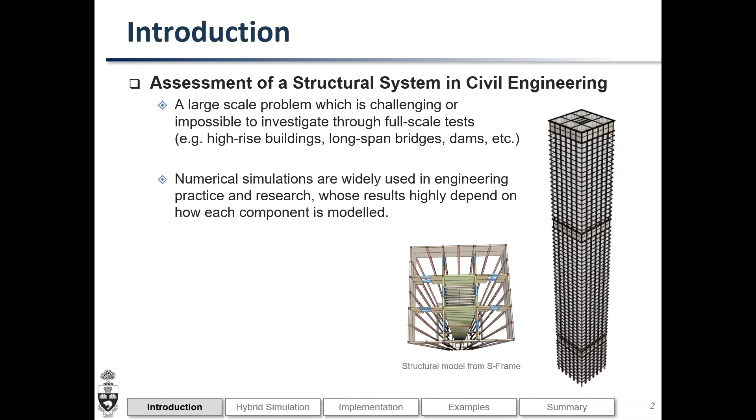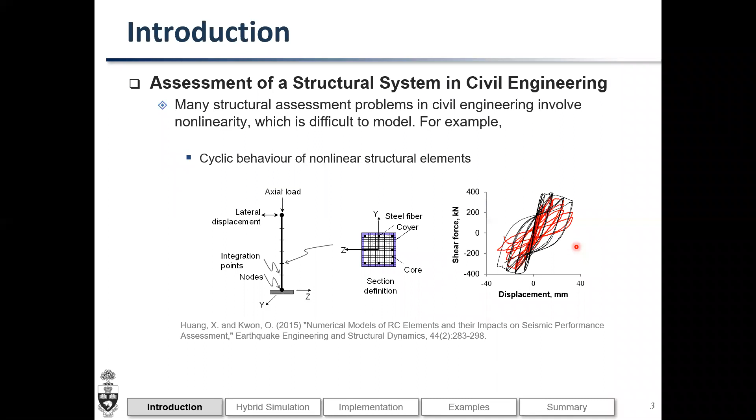There are many other nonlinearity problems in civil engineering. The problem of nonlinearity is important because if the system is linear, it is very straightforward to model. In the equation of motion, for example, you just need to define stiffness, damping, and mass. But if the system is nonlinear, you need to somehow define the hysteretic behavior.

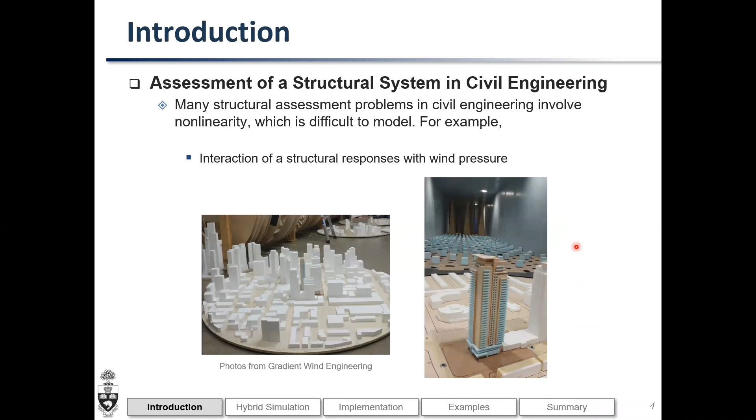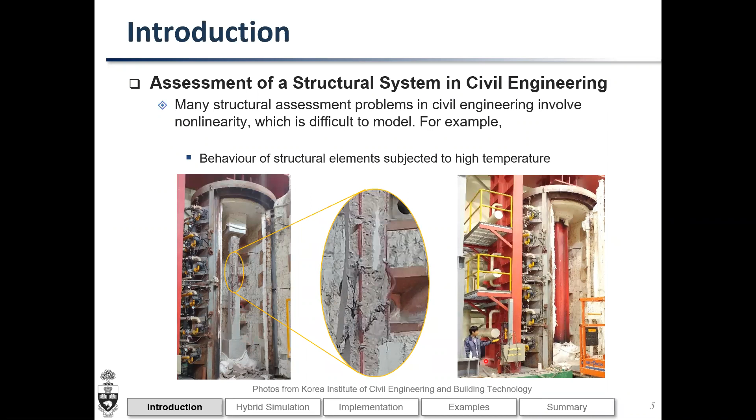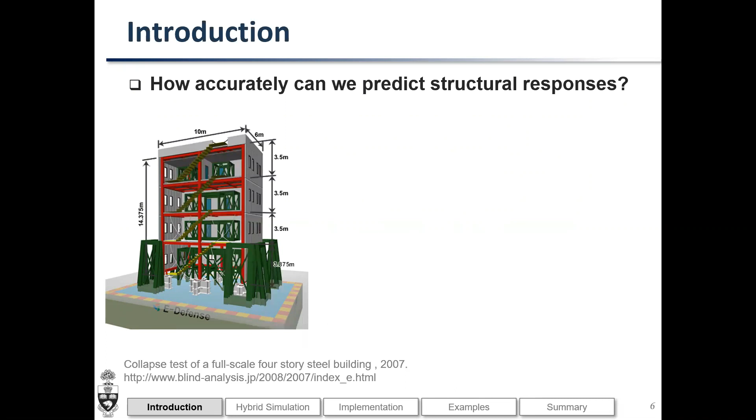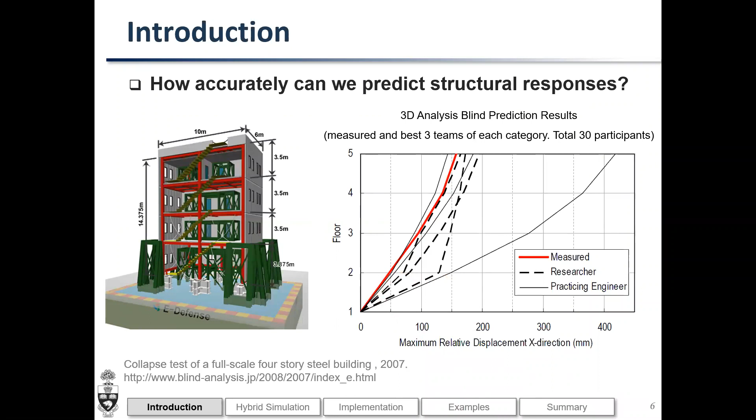So without having much uncertainty in the input to the numerical model, how well can you predict? This is the prediction result. There were 30 participants, and this plot compares measured response, the red line, with the top 3 predictions by researchers and practicing engineers, denoted with dashed and solid lines. As you can see, even though all the information is given as much as possible, the top 3 prediction results are sometimes pretty good, but sometimes quite bad. So depending on how we develop the numerical model based on the given information, our prediction can be very bad or close. There are quite large uncertainties.

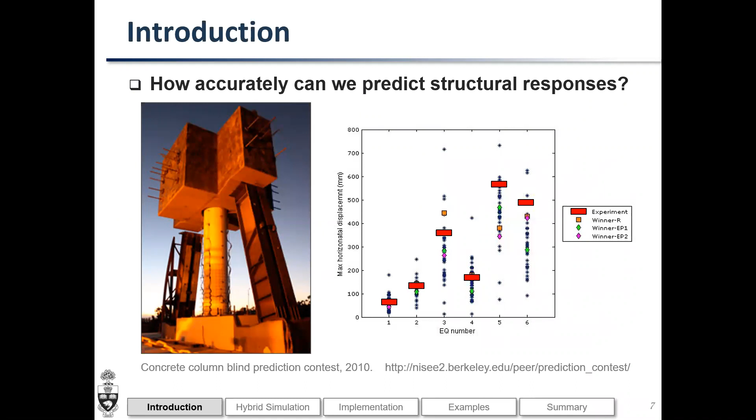That's why we tend to develop experimental specimens as shown here. If we can isolate an element from a system and put it in an experimental setting, like this column testing machine or shell element tester at the University of Toronto, then impose well-defined boundary conditions such as displacement cycles, we can get the result more precisely and understand the behavior better. You can do similar experiments with FE models. If we develop very detailed FE models of connections, our prediction on the connection behavior will be better than just a lumped spring approach. However, this type of modeling approach takes a lot of time and effort.

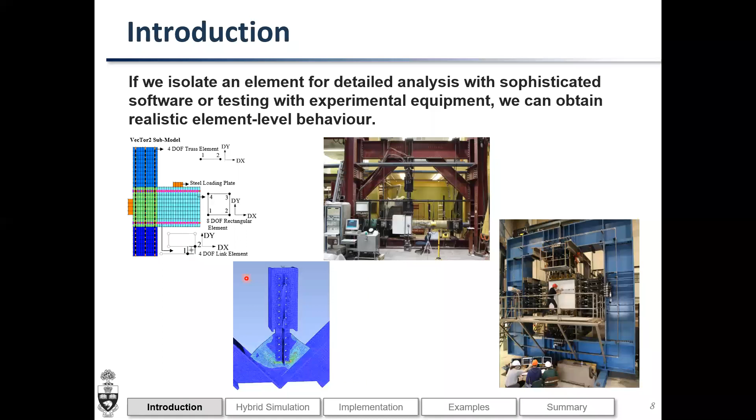The idea of hybrid simulation is to take advantage of these detailed models, either numerical or experimental. So if we can model inelastic cyclic behavior of components in the lab, using an earthquake scenario example, and use detailed models of other components in one FE software and the system model in another FE software, and integrate them all together, wouldn't it be possible to predict the response of a structure more accurately? That is the main idea.

Hybrid simulation is a useful method when there exists bidirectional interaction between a system and substructural elements. If the interaction is not significant, there is no point in running hybrid simulation. For example, if there is a building with thousands of structural elements, and you test only one of them in the lab and integrate it with the rest of the system, the response of that element may not influence the global response. So in my opinion, there is no point in running hybrid simulation. If that element significantly influences the response, then it is worthwhile.

For example, if there is a high-rise building supported on base isolation, and the high-rise building itself remains almost in the elastic range while the base isolation is represented in the lab, then I think this is quite a worthwhile experiment.

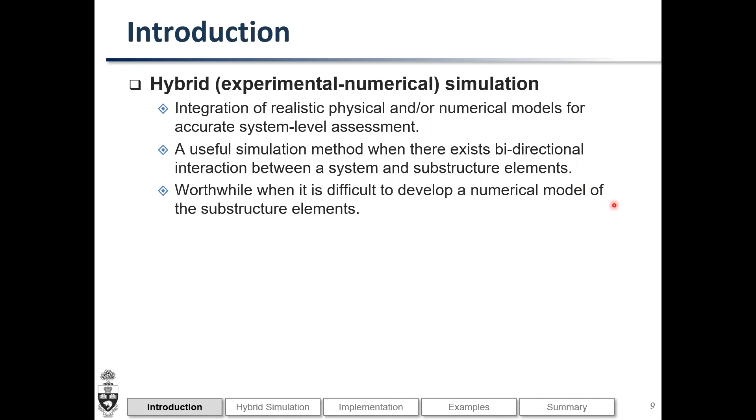Also, hybrid simulation is a very interesting tool, but it is worthwhile when it is difficult to develop a numerical model of these substructure elements. In other words, if you can precisely model the behavior of structural elements, there is no point in running an experiment. But if you have doubt about your numerical modeling strategy, and want to see the actual element behavior and its influence on system-level behavior, then it is worthwhile to run hybrid simulation.

As a last point about hybrid simulation, we need to focus on what we can learn by running it that we cannot learn through conventional component tests or purely numerical simulation. Just running hybrid simulation to integrate a numerical model and specimens in the lab is very interesting, but if you cannot learn anything new in terms of structural response or performance, then it stays just as interesting work without much to learn from the experiment.

So now, in today's presentation, I'm going to give an overview of hybrid simulation. You can see this progress bar. Then I'm going to show you how we implement it at the University of Toronto. The first section is a general overview, and the implementation is somewhat specific to how we run experiments and simulation at the University of Toronto. I'm going to give you several examples, either numerical hybrid simulation, which we call multi-platform simulation, and then repeat this slide summarizing what I've presented today.

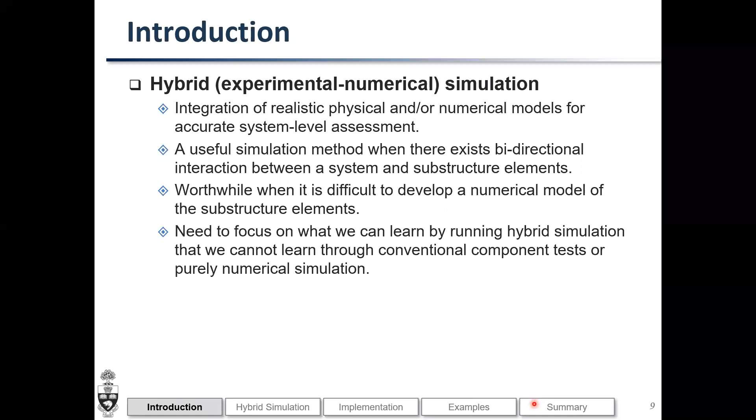In the problem of seismic or earthquake analysis, we are solving an equilibrium equation. At the end, in structural analysis problems, what we are doing is solving an equilibrium equation, either dynamic or static. In the dynamic equilibrium equation, including earthquake load, we have mass term, damping term, restoring force term, and applied force term. For the case of earthquake load, this will be minus m times influence factor times UG double dot.

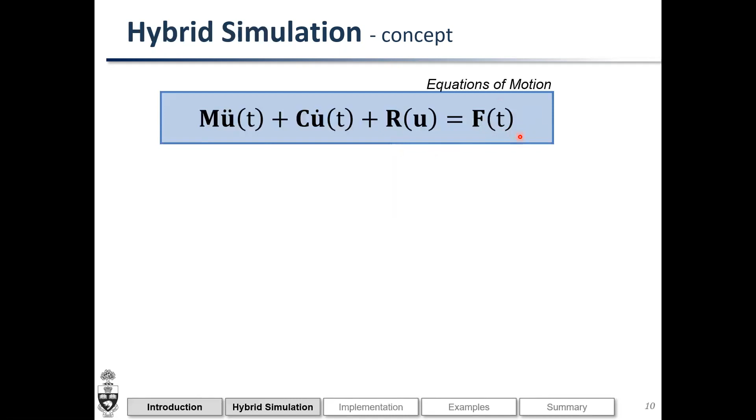In this equation of motion, we can solve this problem numerically using various time stepping methods, but this restoring force term is difficult to model or present using a numerical model, so if the system behaves in the inelastic range.

The idea of hybrid simulation is that we want to solve this equation of motion numerically using computer software, and then measure the restoring force from experiment and feed it back to the equation of motion, and we iterate this process. There are various numerical integration schemes regarding how to predict displacement and how to use the reaction force and how to repeat this process. But this is not the scope of presentation today.

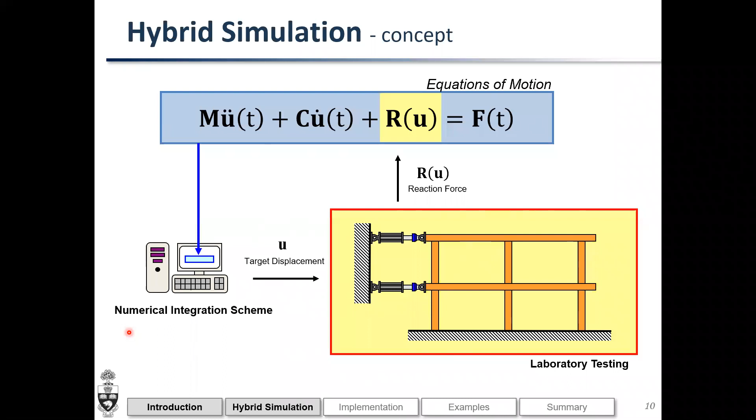Today I'm going to give a high-level overview. If we can model many parts of the structural system confidently using a numerical model, then what we can do is substructuring. So you can put most of the structural system in the analytical or numerical substructure, and then put the experimental specimen in the experimental substructure.

We ensure compatibility at the connection, at the interface, by imposing identical displacement vector that is predicted from the numerical integration scheme. Then restoring force vector is added from the numerical model and experimental specimen, and then we feed this restoring force vector back to the integration scheme. I'm showing this triangular shape to represent that part of this term, the restoring force term, is represented experimentally.

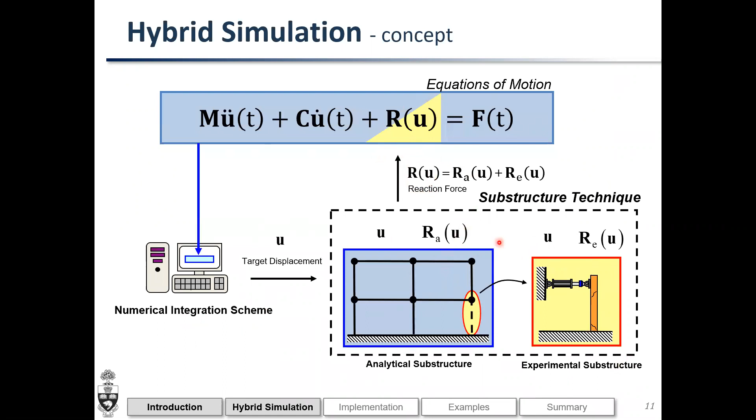This type of problem doesn't need to be only for the restoring force term. For the case of wind-bridge interaction, what they typically do is develop a section model of a bridge in a wind tunnel, and impose wind pressure, the flowing wind. Then there is interaction between the bridge deck's response with the wind. So the wind force, external force, is a function of displacement of the bridge deck and velocity of the bridge deck.

Because there is an interaction between the applied wind flow with the displacement and velocity of the system, we cannot predefine this right-hand side term. So this term can be represented experimentally in the lab because it's difficult to model numerically, and part of the system's mass is represented physically. So part of this force vector is represented physically, and we can run the hybrid simulation as well. This is one of the topics my students are working on nowadays.

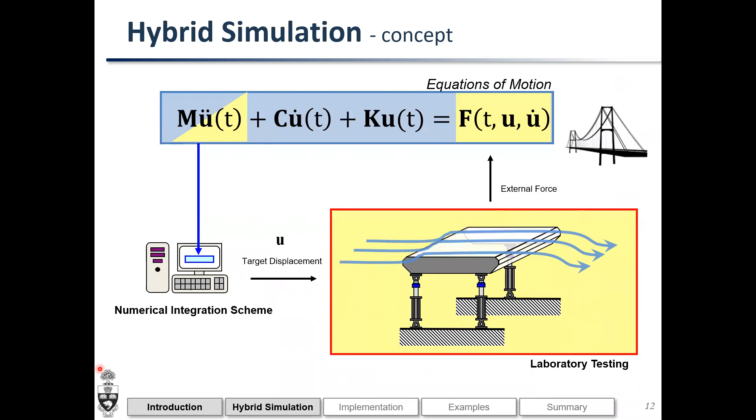Another application of hybrid simulation is structural interaction due to fire. Let us assume that this structural system is subjected to fire, then we are solving this problem. This is a static problem where the restoring force vector is a function of imposed displacement, temperature, and applied force. In this case, the applied force is the gravity load, and temperature changes over time.

Let us assume that we satisfy equilibrium and temperature changes gradually. Then what happens is that this equilibrium between restoring force and external force will not be satisfied. So we need to update displacement such that equilibrium can be ensured. We are solving a nonlinear solution scheme to ensure equilibrium between restoring force and applied force, and in that solution scheme we predict target displacement and run the experiment.

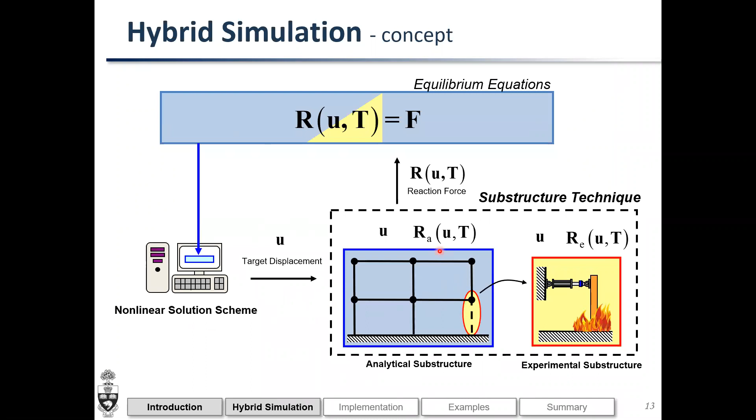As I explained briefly a few slides earlier, in hybrid simulation we essentially solve equilibrium equations, either static or dynamic. Hybrid simulation doesn't need to be only an earthquake engineering problem or dynamic problem, it can be a static problem as well. As long as there are parts of the equilibrium equation that are difficult to model numerically, we can model them experimentally. In the seismic application, for example, this restoring force vector is difficult to model fully numerically.

So part of the structure can be modeled experimentally. In the temperature load case, similarly in the wind load case, we are in fact defining external force experimentally rather than the restoring force. So terms that we understand well are represented numerically, and the rest can be modeled experimentally. It doesn't need to be restoring force only; it can be either restoring force or external force as well.

Hybrid simulation mainly has two types, as you may have heard from Professor Oh's presentation earlier. One of them is real-time hybrid simulation.

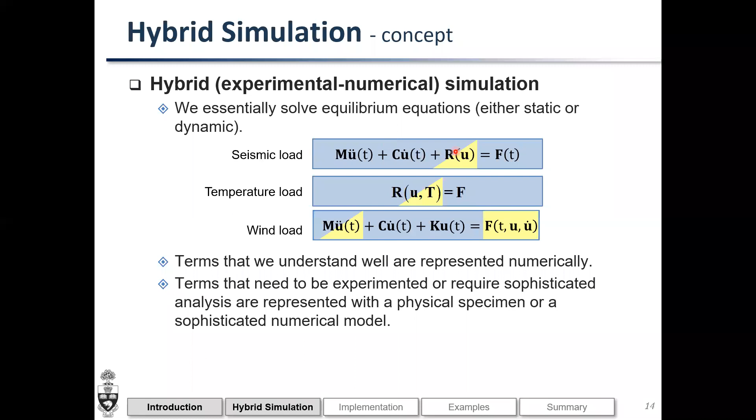Some physically represented terms in the equilibrium equations require realistic rate of loading, because viscoelastic dampers or viscous dampers, as shown here, depend on the velocity or acceleration, not just restoring force but also applied force. Some elements, such as tuned liquid dampers, tuned mass dampers, or inertial mass dampers, require accurate velocity or acceleration.

Wind flow interacting with the deformed geometry of a structure is a function of vibration frequency, meaning how fast the structure moves with respect to the wind, so it also requires real-time simulation. Heat conduction, even though it's a slow process, cannot be controlled in a stepwise manner, so it also needs to be done in real time.

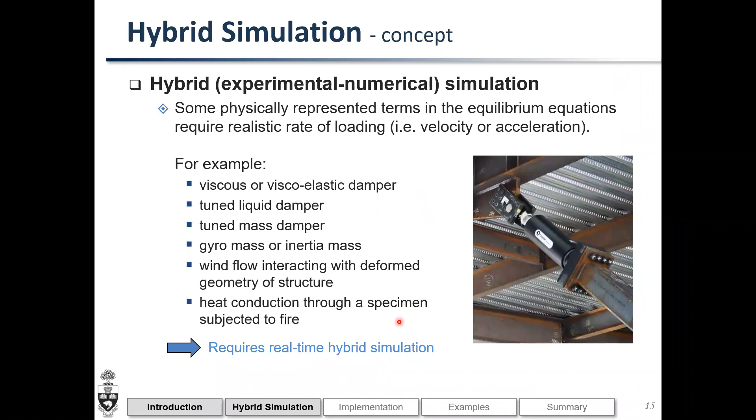These types of problems require real-time hybrid simulation. Some of them are dynamic, like all the cases except heat flow, while others are static or pseudo-dynamic problems—a slow process. But in all of these tests, the experiment should be done at the real rate of loading, or the real rate of temperature increase in the case of fire problems.

There are advantages of real-time simulation. One advantage is the realistic loading rate—if the elements depend on rate of loading, it is applicable. In fact, it applies to all structural elements, regardless of whether they are rate dependent or rate independent. Even rate-independent elements, such as steel beam-column connections, can still be tested using real-time hybrid simulation.

There are also many challenges in real-time hybrid simulation. One major challenge, a long-standing research topic, is actuator delay compensation—the negative effect caused by actuator delay. Researchers developed actuator controllers to compensate for this delay. Also, for dynamic problems, dynamic actuators are required, which differ somewhat from actuators mainly used for static tests.

Numerical models need to be simplified for real-time simulation. Not only the experiment but also the analysis must be completed within a given time step. For example, if we run a time integration scheme with a 0.01 second numerical integration time step, then all analysis and experiment must be completed within that 0.01 second, and the responses of both need to be integrated together.

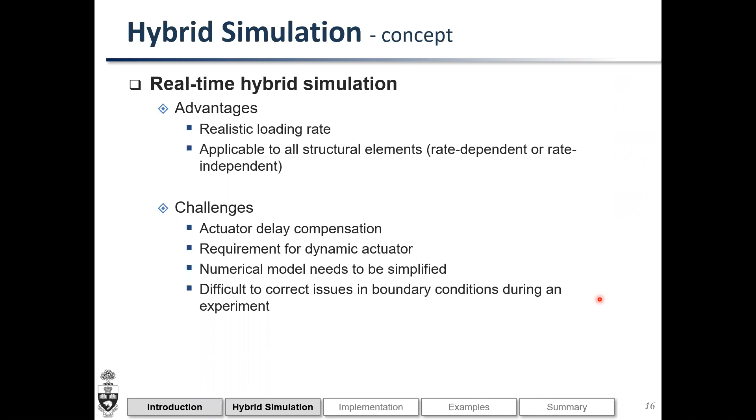Many other physically represented terms in the equilibrium equation I explained earlier are rate independent. In fact, most civil engineering structural elements made of reinforced concrete, steel, wood, or masonry are rate independent, meaning their behavior is mainly a function of displacement history rather than velocity or acceleration. Some studies show rate dependency in these elements, but for earthquake engineering problems, I feel this rate-dependent behavior is not very significant.

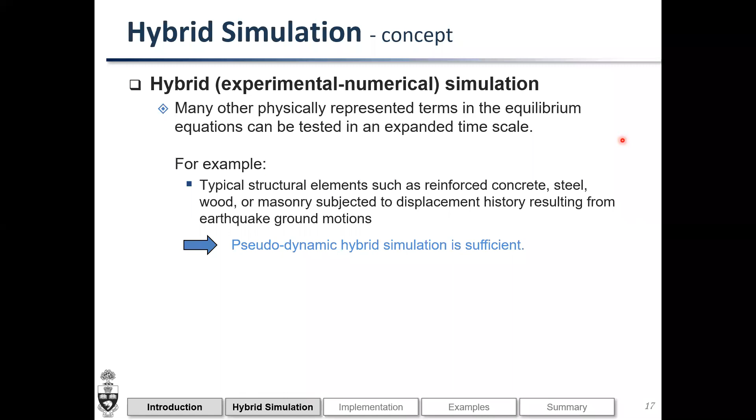For this kind of problem, we can use pseudo-dynamic hybrid simulation. Its advantage is that we can use a sophisticated and highly nonlinear numerical model for the rest of the system, because the time scale is expanded—we don't need to finish the numerical integration within a given time step like 0.01 second. We can run many iterations in the numerical model before moving on to the next step.

Because this is not a dynamic problem, but a static problem, we do not need the dynamic actuator. Most conventional hydraulic actuator controllers can be used.

I'm going to explain this further later on when I explain the communication. Delay compensation is not required because delay is not an issue.

There is time to correct any boundary condition issues during the test, such as elastic deformation, slip, and gap in the experimental setup. We try to avoid these when we build the experimental setup, but we cannot perfectly eliminate all of this, so we need to somehow correct this during the experiment.

The challenge of this method is that we cannot run the test with a damper, such as a viscoelastic damper, which is rate dependent. So this pseudo-dynamic hybrid simulation method is applicable only to rate-independent elements.

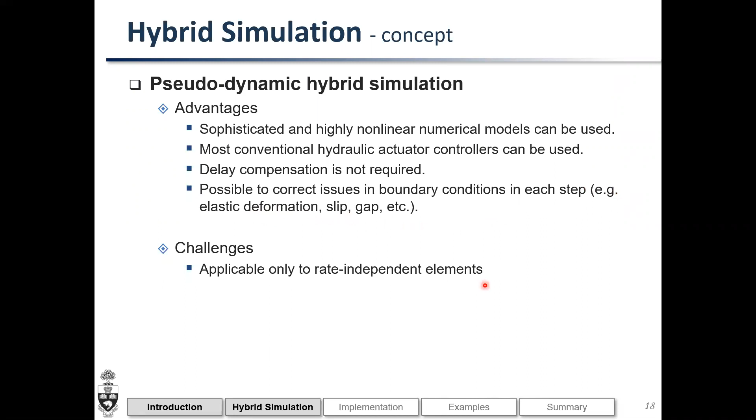Basically, hybrid simulation is a substructuring technique. The restoring force vector is sometimes displacement, velocity, or acceleration dependent, depending on the type of problem. But as long as you can substructure it and solve this equation of motion or equilibrium equation, then you can run hybrid simulation.

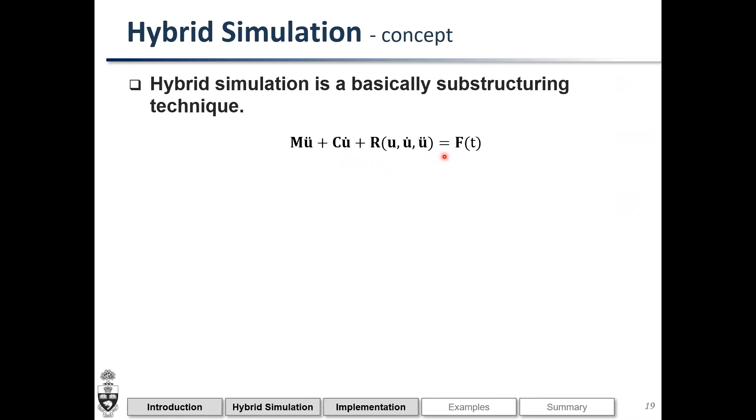Dynamic problems can be nonlinear as well. We typically use an explicit scheme, however, to avoid iteration that we normally do in the implicit scheme.

We typically use a non-iterative solution method even for the nonlinear solution scheme, especially for real-time simulation, because if we need to do a certain number of iterations and that number differs at every time step, it becomes difficult to maintain the timing.

Another essential component to run hybrid simulation is communication. At the end, hybrid simulation is in a sense very similar to typical finite element analysis, in that some of the restoring force vector comes from one element, another comes from another element which is now physical, and we are just assembling them to form the large restoring force vector.

So the problem is how to send predicted displacement to the actuator controller, how to read the force, and how to feed it back to the FE analysis software or numerical integration module. Communication becomes one of the major components in implementing hybrid simulation.

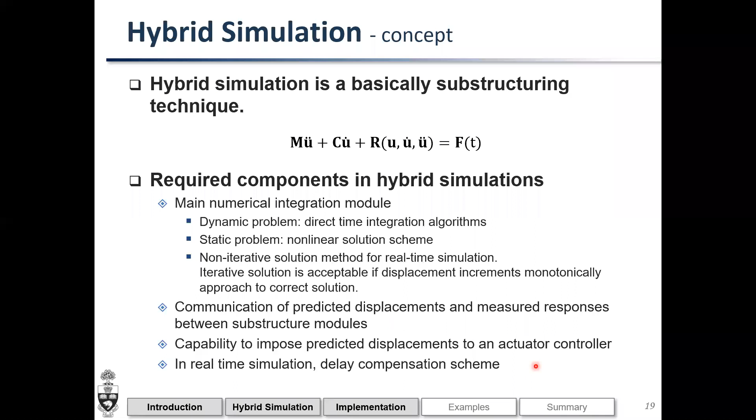Now I'm going to show you how we implement and run experiments at the University of Toronto.

UI-SimCor is the program that I wrote when I was a student, which runs only the time integration scheme. It doesn't have any numerical model or numerical elements - it just runs the alpha-OS scheme or any other time integration scheme. The restoring forces are all taken from either experimental substructure modules or numerical substructure modules.

We have developed a program called Cyrus, mainly to integrate various VecTor programs specialized for reinforced concrete structures. Sometimes we use OpenSees SP or MP, Abaqus, and S-Frame, etc. So the integration module can be anything.

If you have your own program, you can use it as the main program for hybrid simulation. As long as you can send data to the substructure element, either numerical or physical, and get the data back to your software, then you can run hybrid simulation.

So the main component of hybrid simulation in that sense is communication. As long as we can send and receive data between various software, then we can mix and match various numerical or physical elements and develop a system-level model.

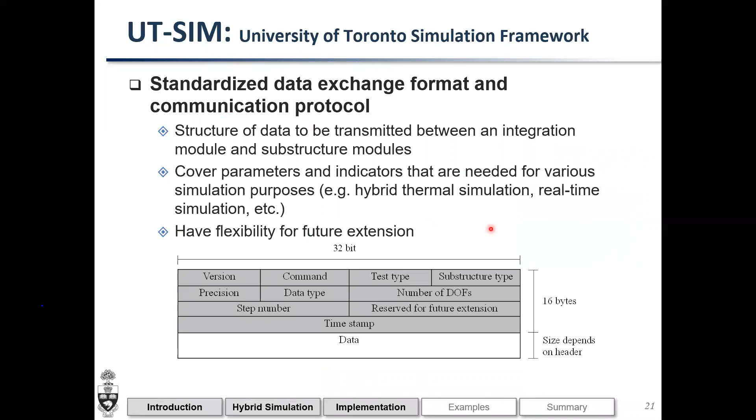We can use a library and connect to any one of these to send and receive data. This is a very flexible structure. We built a library file which you can call to connect and send and receive data.

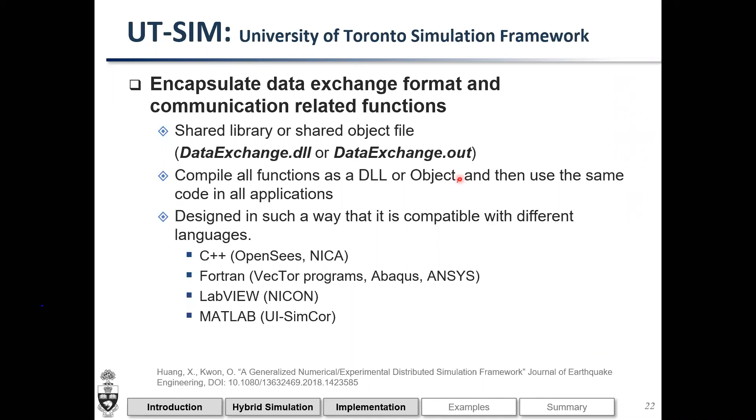This library file has been compiled as a dynamic link library (DLL) file, or the out file for Unix systems, so it can be called from C++, Fortran, LabVIEW, and MATLAB. You can build your own substructure model in MATLAB or OpenSees and connect it to other programs. Another main component in running hybrid simulation with a physical specimen is communication between the actuator controller and one of these main integration modules. Typical actuator controllers do not have functionality to receive and send data through a network, so digital communication is needed.

So what we have done is this: we developed a program called NICON, which we call the Network Interface for Controllers.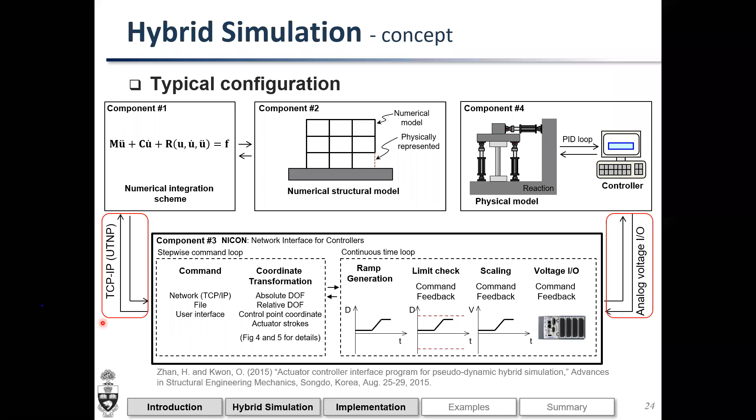In pseudo-dynamic hybrid simulation, component number 3 is not running at full speed in real time, but it performs many checks and corrections for the boundary conditions. So in terms of communication, as I explained, we use TCP/IP network and analog voltage I/O.

Why are we using analog voltage I/O? There are some reasons. Between hardware controllers—in this case hydraulic actuator controls—and the software, there are various ways of running communication. One is SCRAMNet, which is quite common with MTS actuators. In other fields like robotics and factory automation, they communicate with the controller through Modbus TCP or EtherCAT—digital ways of exchanging data.

As far as I know, most hydraulic actuators, if you have an actuator and controller in your lab, communicate via analog means—imposing displacement commands through voltage signals and outputting results the same way. Analog communication is the very traditional way of imposing displacement and receiving measured responses in most hydraulic actuators.

In the past, I've used MTS controllers, and other controllers from Instron and Samyeon, etc., to run pseudo-dynamic hybrid simulation using analog voltage I/O signals. That's the reason why we use analog I/O to run communication between the numerical model and the actuator controller.

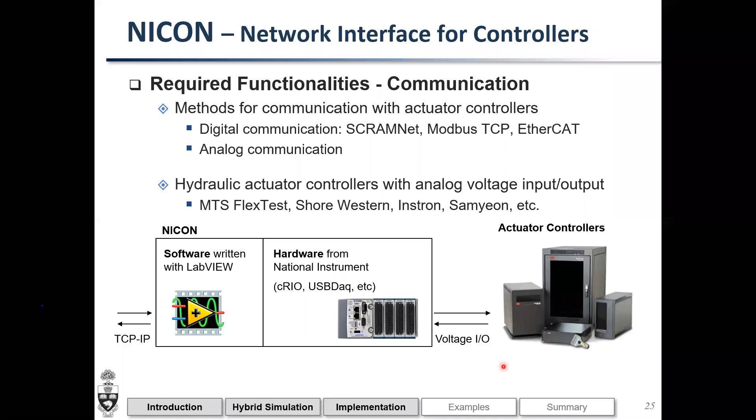There is certainly a disadvantage of voltage I/O because of inherent noise from analog signals, but as long as you insulate and ground them properly, it's fine. I've seen many other research groups using analog voltage I/O to run real-time hybrid simulations as well.

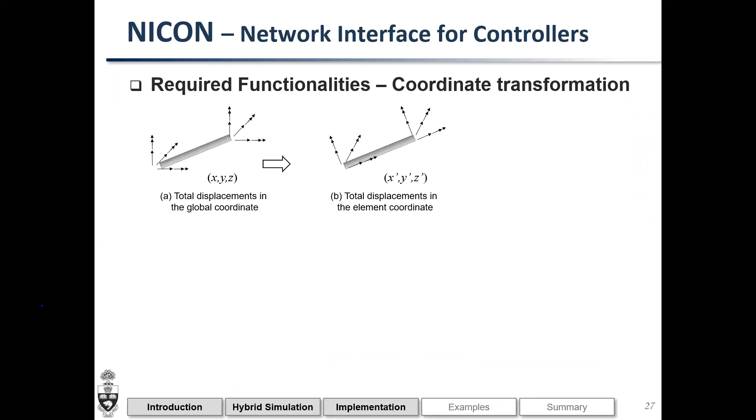There are several other functionalities that the interface program takes care of, such as coordinate transformation. For example, in FE software, if you analyze a frame element with 12 DOFs per element—6 DOF per node—we need to align them to a local coordinate system, because the rigid body mode does not influence the restoring force of the element. So we take out all the rigid body modes and just use the deformation modes.

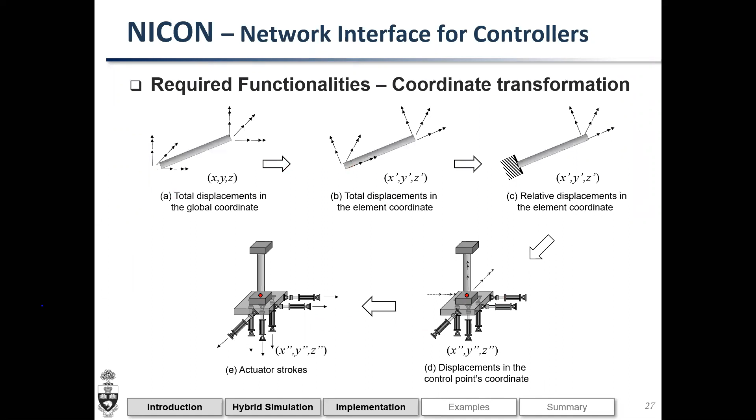Because this local coordinate system may not be aligned with the experimental setup's coordinate system, we need to align it. Then the experimental setup's displacement vectors will be different from the individual actuator's stroke, so we need to convert the displacement in the experimental setup's coordinate system back to the actuator's strokes. Once we impose deformation, we read forces from the load cells and convert these readings all the way back. This is the one process that we need to have in the interface program.

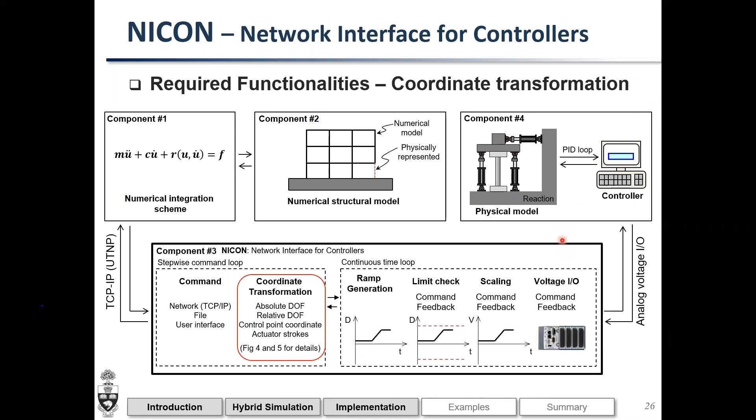There are several other features, such as ramp generation. It can be ramp and hold, or continuous, or safety checks, etc. In case the command is too large and may damage the specimen or equipment, we need to control that.

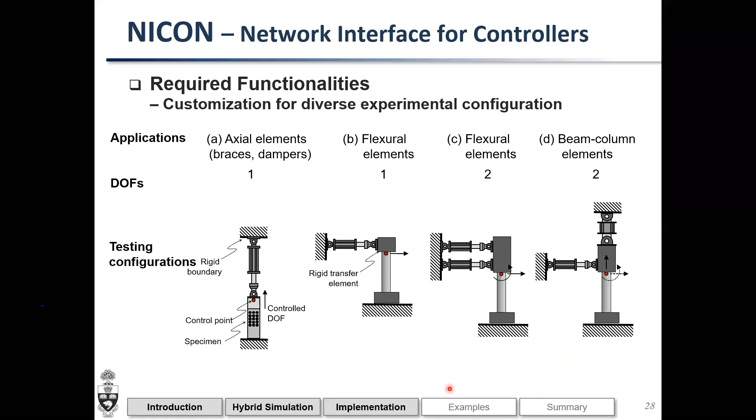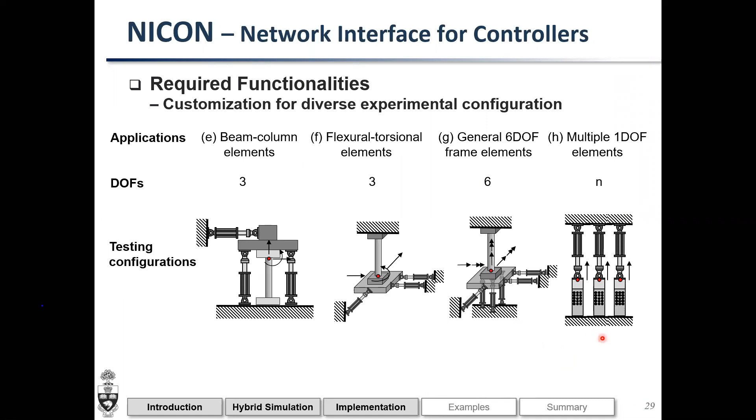So these are the main features of the interface program, which has been generalized for various test configurations in civil engineering problems, such as shown here or in the next slide. You can do multi-DOF control or many single-DOF control. Essentially, if you want to run hybrid simulation or pseudo-dynamic hybrid simulation in your lab, what you need is one of these software, or it can be your own program, like MATLAB.

And then what you need is a way to send and receive data to the actuator controller. To receive and send data, we can use network communication using the UTNP framework. And then to impose received displacement to the actuator controller, we use NICON, which is written in LabVIEW, and it interfaces with various hardware, data acquisition hardware from National Instrument.

For the purpose of training, because in the very beginning it's hard to start, and also it's a little bit dangerous because you don't want to damage the specimen or equipment, what we have done in our group is build a controller, actuator, and specimen which mimic the behavior of a hydraulic system. It's not high power, it doesn't have high force capacity, and it's not real time.

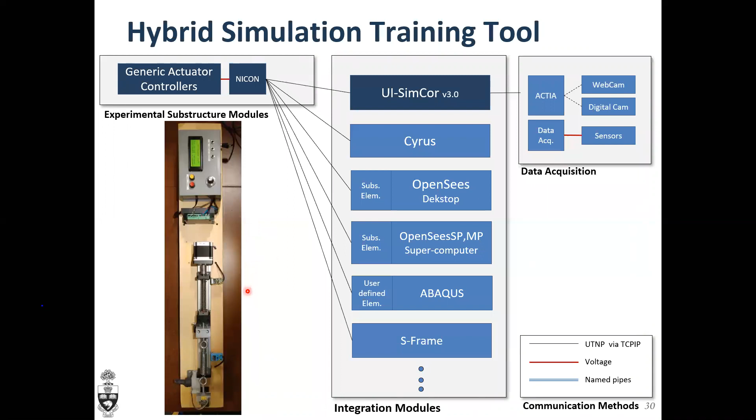So I'll show you several application examples. For the sake of time, I'm going to go through somewhat quickly. One application example is using UI-SimCor, OpenSees, and a generic actuator controller, where we tested a self-centering energy dissipating brace, which was invented by my colleague, Professor Constantin Christopoulos.

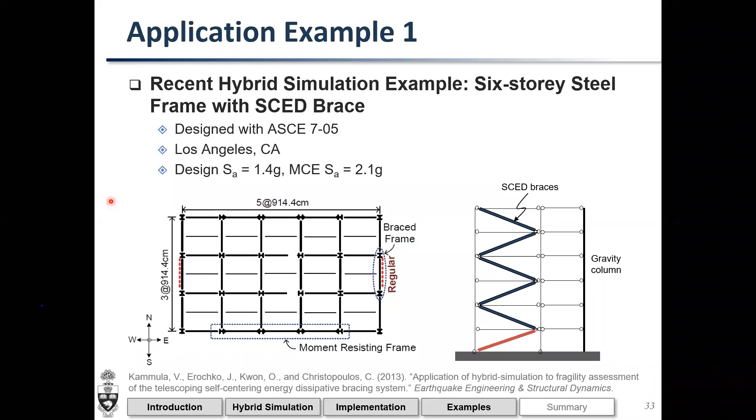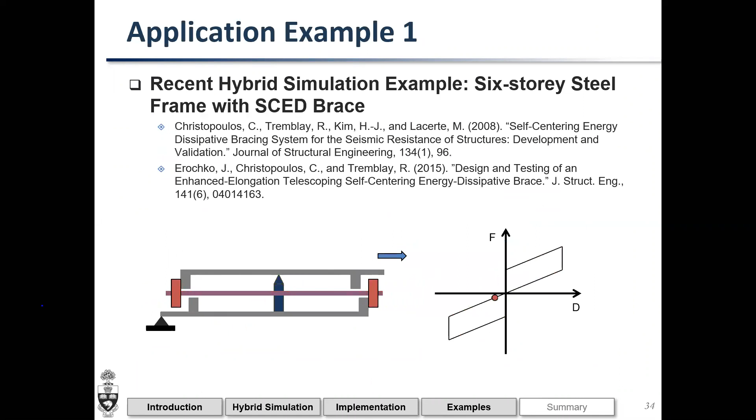So the building is a 6-story building, and the brace is an energy dissipating brace. It mainly consists of two steel tubes confined with a tendon. Both in compression and tension, it behaves linear elastically. The tendon behaves in the linear elastic range, and it comes back to the original configuration after imposing large inelastic cycles of loading. So we ran pseudo-dynamic simulation.

The specimen is in the lab, and data exchange between the specimen and the OpenSees model was carried out through internet network and analog voltage I/O. You can see the lower connection, upper connection, and hysteretic behaviors, etc. I'm not going to go through details about the test results for the sake of time, but this is the way we ran hybrid simulation. You can see the overall configuration of the experiment.

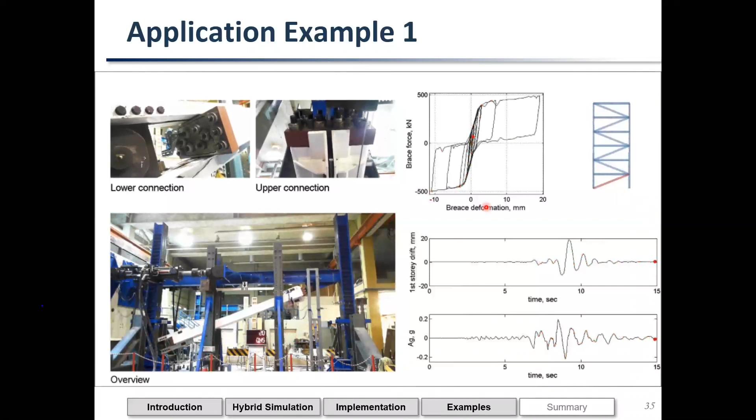Another example is the integration of OpenSees with a generic actuator controller. This is not using, as I told you before, UI-SimCor—you just impose voltage signals from NICON to the actuator controller. In this test, we use the hardware called UT10 simulator, with which we can test up to 10 actuator-loaded elements simultaneously.

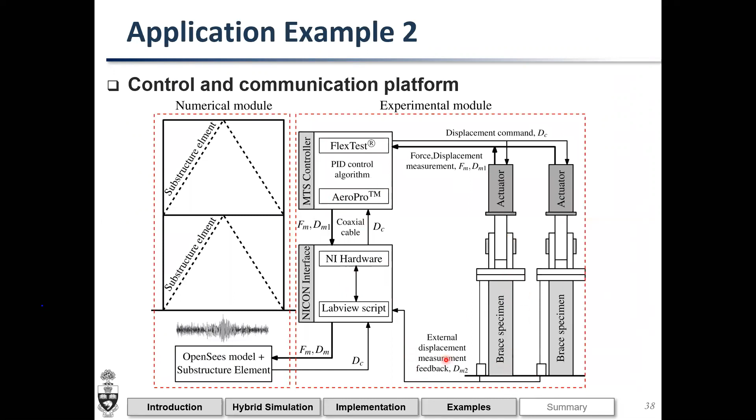Because the actuator-loaded elements are typically very stiff and there are problems with elastic deformation, what we do is measure the deformation of the specimen directly from the specimen and feed this data back to NICON to correct commands. There is some error correction loop between NICON, the MTS controller, and the specimen. We use OpenSees to run the main integration module, the numerical integration module.

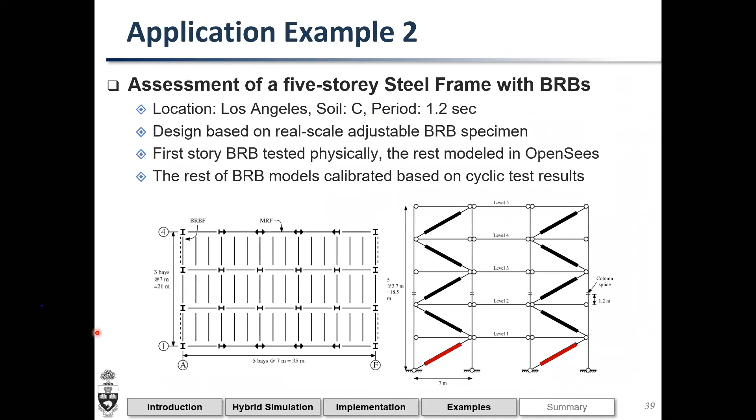So we ran an experiment for a 5-story building designed for Los Angeles. This is showing the experimental specimen, which represents the core of the building, and this is the experimental result.

You can see there is a slight difference between the experimental result, which is hybrid simulation shown as the black line, and the numerical result, shown as the red line. This slight difference resulted from unloading during the loading phase. When there's a transition between elastic and inelastic behavior, the numerical model shows a sharper transition than the experimental result, causing this difference. This shows that by running hybrid simulation, we can identify potential issues with the numerical model as well.

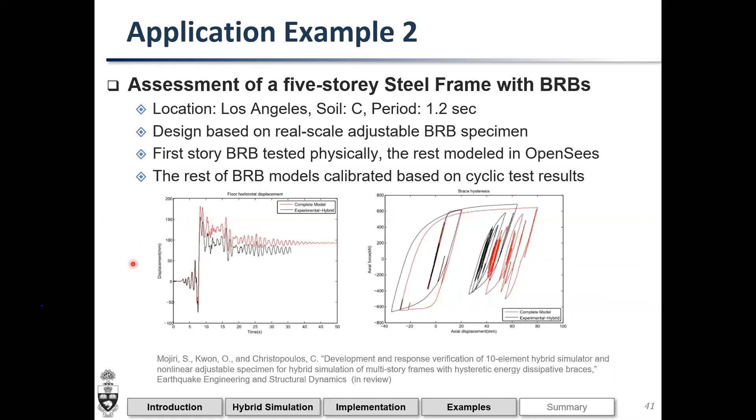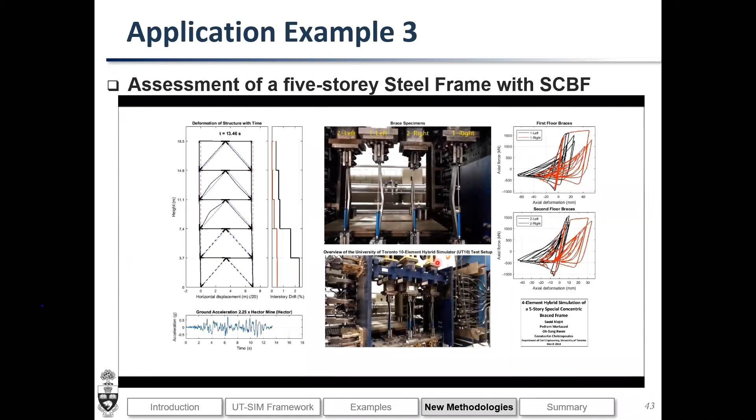We have done 3 element tests, with 3 BRB elements tested simultaneously. Recently, using the same test configuration, we ran a hybrid simulation of 4 buckling braces simultaneously, representing elements 1, 2, 3, and 4 in a building. The buckling hysteretic behavior is quite complicated, but it's nicely represented physically in the lab, looking like dancing back and forth. This represents the braces in the lab within the numerical model.

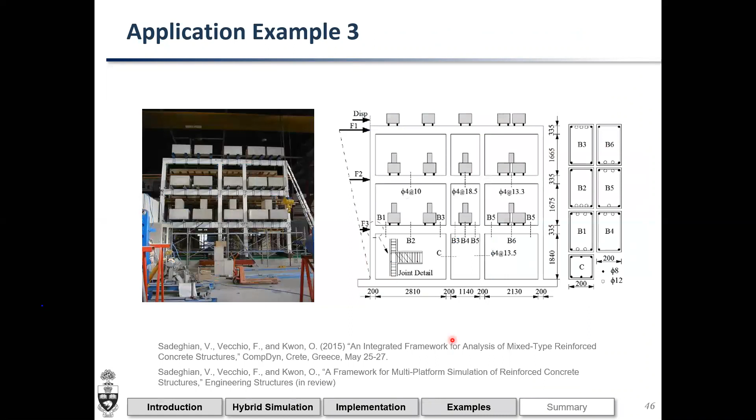Another application example is numerical hybrid simulation. As I mentioned, this type of simulation technique doesn't always need to involve experimental specimens. If you have a better tool to represent a component of a system, you can run numerical simulation as if you were running a physical hybrid simulation. In this case, we modeled a 3-story building where the beam column connection is the critical area. This connection failure is very difficult to model using frame elements unless you use calibrated lumped springs.

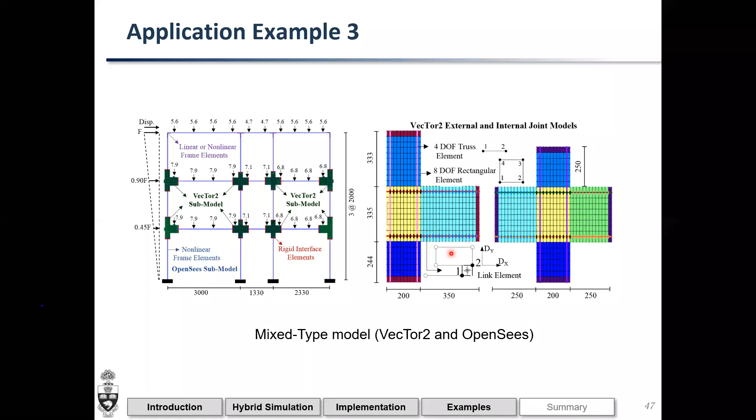For this study, we modeled beam column connections using VecTor2, a specialized analysis tool for reinforced concrete structures based on the modified compression field theory developed by Professor Collins and Professor Vecchio at our institution. By integrating VecTor2 and OpenSees, we could see the crack distribution and shear failure of the connections, similar to what we observe from VecTor2 output. So we ran a multi-platform simulation.

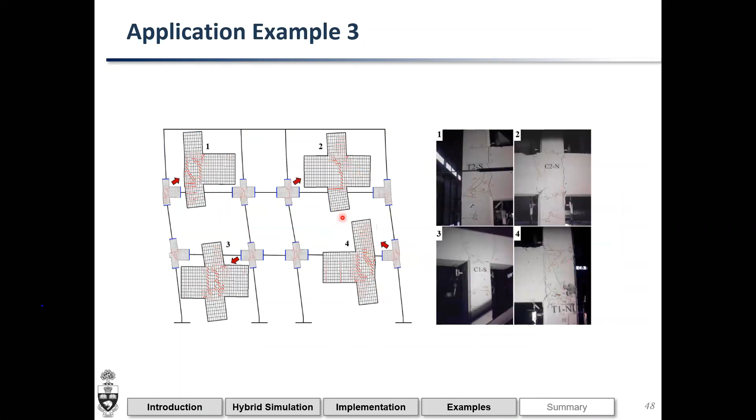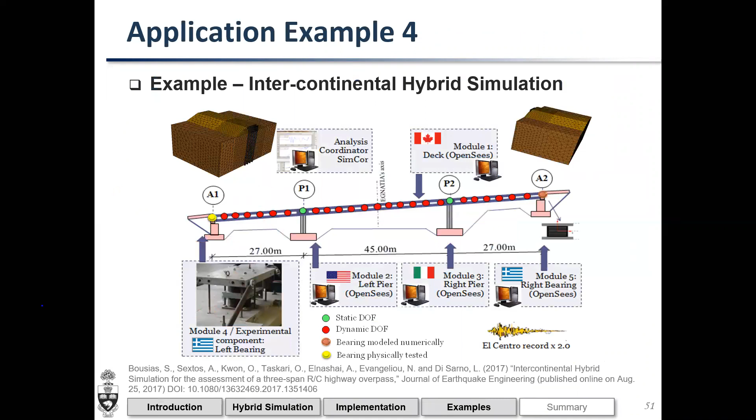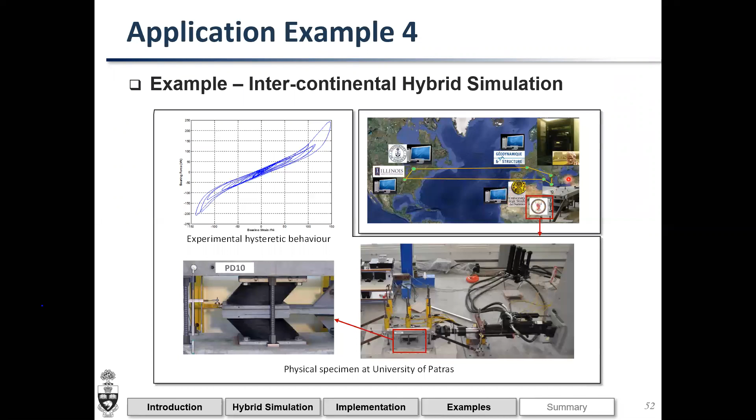Another example is the integration of UI-SimCor with NICON, the actuator controller, and OpenSees. Because this communication layer runs through an internet network, we can separate the programs across many institutions and substructures. In this demonstration experiment, we simulated a bridge where one bearing was tested at the University of Patras in Greece, while various other components were placed in Canada, the US, Italy, and Greece. This allowed us to run multi-site distributed simulation using the method we developed, taking advantage of unique experimental facilities around the world.

Another example involves Abaqus and hardware actuator controllers. Abaqus doesn't have functionality to run communication, so we developed a user-defined element for Abaqus that runs communication through a network. These user-defined elements predict displacement and send it to the program NICON, which communicates with the generic actuator controller. In this example, I'm showing a 4-story building where the first-story column is modeled in the lab inside a furnace.

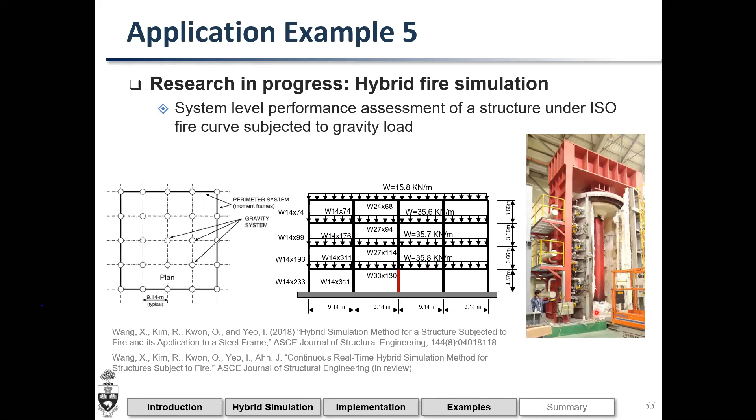This is a furnace where we can burn gas and increase temperature. The column appears red, not because it's painted, but because it's glowing from heat. The temperature load is modeled in the lab, and the interaction between the structural system and the specimen was done through hybrid simulation by controlling the actuator at the bottom of the experimental setup, allowing us to impose temperature and deformation simultaneously.

You can see that while imposing gravity load, the column shrinks a bit due to compression, and as the load increases, the column eventually expands when heated. As temperature increases further, the material property changes from elastic to inelastic, and the strength of the column decreases, so it starts yielding even though it keeps heating, causing the force to decrease due to yielding and changing material properties. Once we start cooling, it goes all the way through. You can see the collapse sequence of the entire system through hybrid simulation, and we can impose more realistic boundary conditions than a conventional constant load fire test.

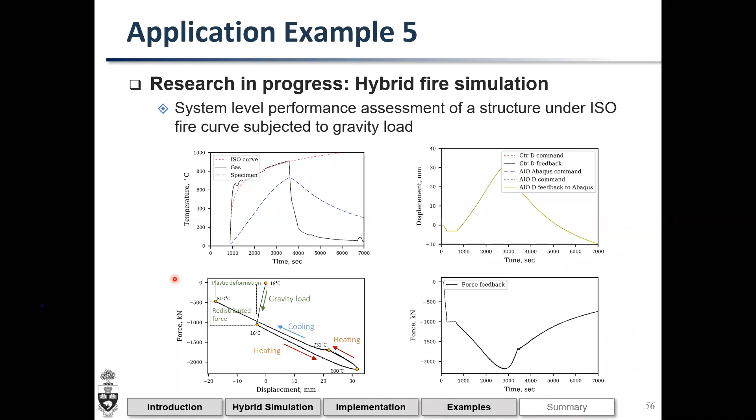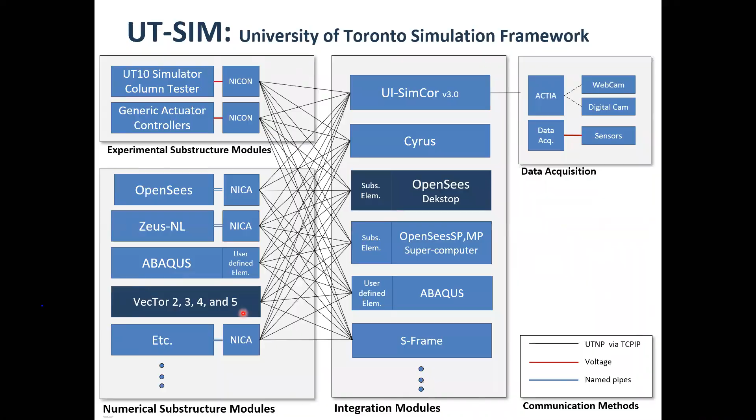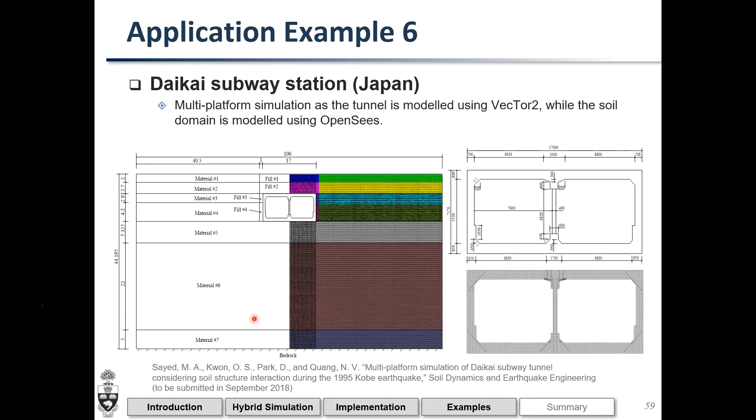Another example is OpenSees and VecTor2. I noticed some of you registered audiences have a background in geotechnical engineering, so this example is, in fact, a geotechnical engineering problem. We modeled the Daikai station that collapsed during the 1995 Kobe earthquake, where the soil was modeled in OpenSees and the tunnel itself was modeled in VecTor2, since the VecTor2 program is good for modeling reinforced concrete structures.

By modeling the tunnel using the most representative numerical model, while the rest of the soil domain is modeled in OpenSees, we could see clear interaction between the soil domain and the structure, and the failure sequence as well. If we use a single software, it is somewhat challenging because not a single software includes all the features we need for research or engineering practice.

So hybrid simulation, pseudo-dynamic hybrid simulation, doesn't need to involve experiment. If you find it feasible, you can make a detailed model in other software and connect it to other system-level software and run the interactive simulation.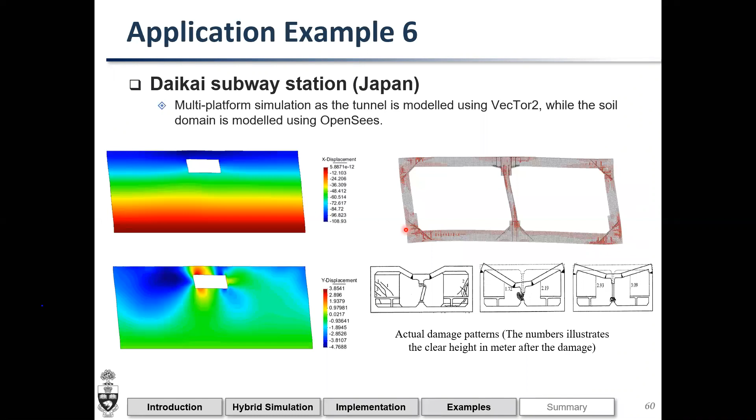So I just presented about the hybrid simulation. Hybrid simulation method is a useful tool for analysis of structural systems, where part of the structure can be better represented with a physical specimen or other sophisticated numerical models. When I say part of the structure, in fact I should say some terms in the equilibrium equations, because sometimes we define the load unphysically. So if you can model some of them more realistically, then you can get a more realistic, more accurate prediction.

Hybrid simulation, as I explained earlier, is a useful tool when there is significant bidirectional interaction. If there is only unidirectional interaction where the system response governs the elemental level response, then there is no point of running hybrid simulation. If element behavior influences the system behavior and the system's behavior influences back the element's boundary condition, then it is worthwhile to run hybrid simulation.

Unlike real-time hybrid simulation, pseudo-dynamic hybrid simulation has some advantages because it can involve sophisticated numerical models, especially because it does not require completing analysis in a very short time interval. And also, we can use a conventional hydraulic actuator control system. So even if the hydraulic actuator control system is decades old, as long as it has analog input and output, then you can run hybrid simulation.

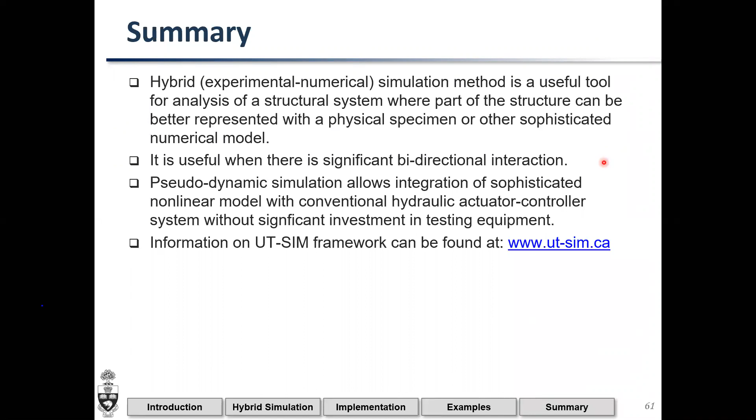We have developed a website and manual to run hybrid simulation the way we do at the University of Toronto, and some of the information is available on the website. If you need any further information, feel free to send me an email. My email is shown at the beginning of the presentation. Thanks for your attention, and I'd like to answer your questions.

If you have any questions, I can answer them right now if you type your questions. But what I'm seeing here is that I do not see any questions online. So if you have any questions, you can either type them now, or you can unmute and ask questions online.

A question was just posted. How was the interaction between VecTor2 and OpenSees modeled? That is the question.

In a sense, that is done in exactly the same way that I explained. Let me first show this slide. OpenSees is running on a desktop. We developed a substructure element which runs communication through a standardized data exchange format and protocol. So the OpenSees system model includes a substructure element. The substructure element communicates with VecTor2, and we included the same communication protocol in the VecTor programs as well. So OpenSees runs one step of analysis, predicts displacement, sends displacement to VecTor2. Then what VecTor2 does is run analysis by imposing the boundary condition, and then returns the restoring force back to OpenSees, and we continue. So VecTor2 in this case is used as if it's a physical specimen in the lab. That was the way we ran the OpenSees-VecTor2 integration, and that was the way they were interacting.